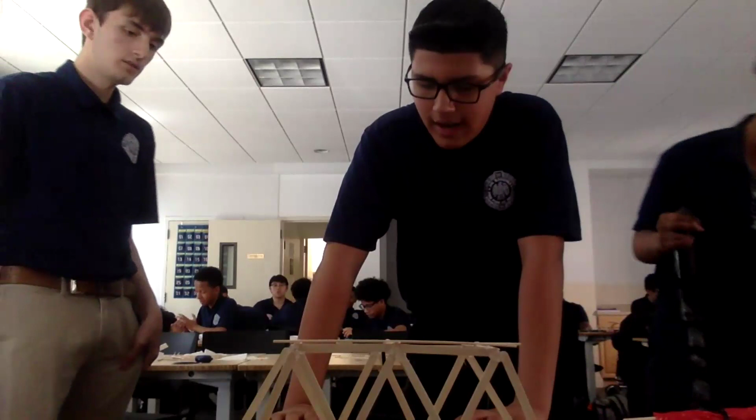So we took inspiration from actual bridges, so we put the trusses on, and we also double reinforced our actual walkway for the bridge, to make it as sturdy as we can. Yeah, basically, you can see their walkway there. Oh yeah, that's impressive, very sturdy.

Looks like it has a really solid base as well. That's always important. Oh, look at that, supporting some good weight. Yeah, that's a lot of weight.

How much weight is that? 15, 16 kilograms here too. Nice, wow, that's like 35 pounds. That's really nice, everyone's pretty consistent. Yeah, everyone's hitting that 15, 16 kilograms. It's really impressive, that's the most we have.

That's the biggest one so far, yeah.

I like that they took inspiration from a real bridge and used the truss design as well as reinforcing the bridge deck. That's what structural engineers do daily. Isn't that cool? I think some of the greatest innovation we can have is from nature. The body, the Earth, and the universe are some of the most outstanding systems that have ever been developed.

We have one more coming. Nice, okay, killing it, James. I see a lot of future civil or structural engineers in this Zoom call.

So we have no clue what we were doing at all, right? So we just went with whatever we thought was right. We added triangles to the bottom, and we added support to the top as well. And our first trial we got around 6,000 grams, 6 kilograms.

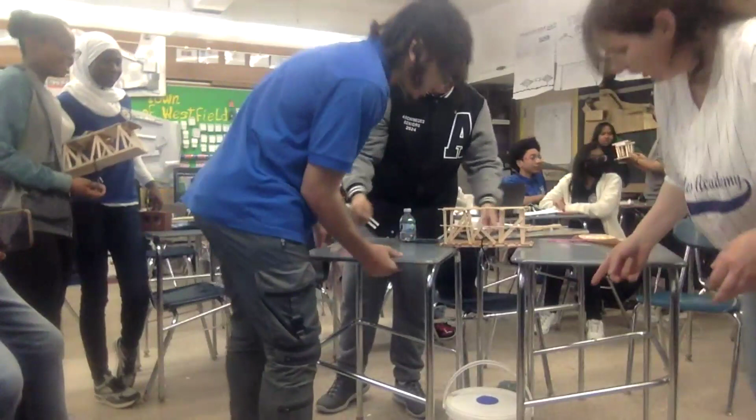This is a great view too, we can really see it all. Yeah, look at that huge bucket. Wow, that may be some serious weight.

Nice, all right, give me the brick. No, give me the brick. Archimedes, Bronx, New York.

Oh, he's adding a brick. Adding a brick. Oh man, the tension, no pun intended, see the tension. Look at how delicately that brick was placed, so gently, ever so gently.

Oh, man, don't worry, you got this bridge. Hey, you got this, you got this man, you got this. Brick number 2 is going down. You gotta have confidence in that beautiful lady, you got this.

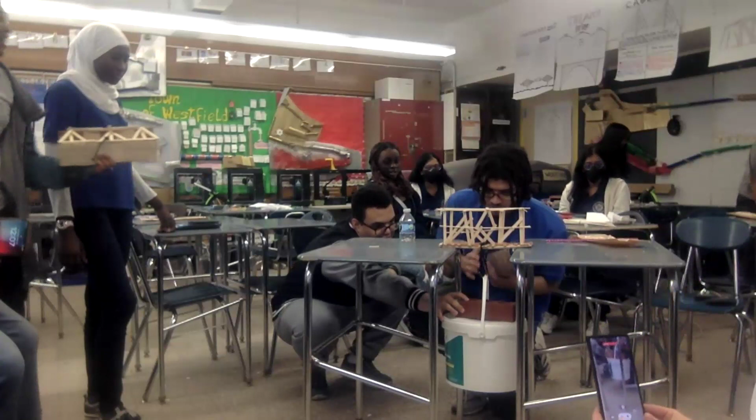That's the experience, yeah, put it on the side. Yeah, that's right, nice. If it breaks, just blame Jerry, he's there with you.

That's nice, look at that. Let's go. That's right, I love the excitement. That was 18 pounds, right? You all did a great job. Can we get the next one? Well-deserved celebration, yes.

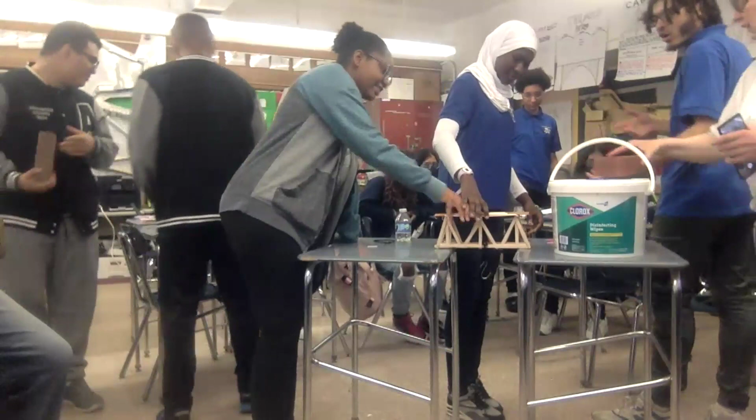So Archimedes is going to test one more bridge. All right. Check out the sturdy base design. There is no budge, wow, that's really sick, impressive.

I'm trying to figure out, Morgan, what's going on at the top of this design. All right, Archimedes would like to test one more. Okay, all right.

They have a great setup, Archimedes has a great setup. Hey, Monica, is this the last school? This is the last school. Okay, I don't have anybody else. So yeah, as Monica would say, you gotta bring it, you're the last one, you gotta bring it.

Another nice design, that's nice. Jerry, you're doing a great job out there, man. Great job by the students at Archimedes. Yeah, you're doing a great job as well. No, it's not, we'll see. All right, let's see, 18 pounds, 18 ounces.

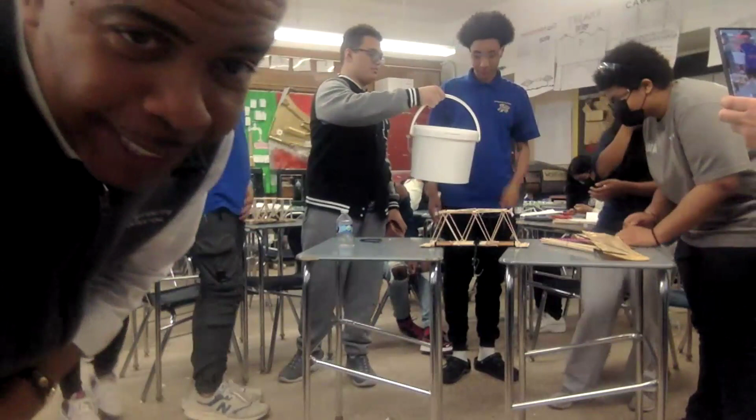So all right, here's the test, let's see it. What do we think, this bridge is going to take the bucket and both bricks? What are you thinking? I don't know if it can handle a brick. You don't know if it can handle a brick? Let's see with the bucket.

Oh, there we go, right, there we go, very solid. Sheesh, I was wrong, Monica. All right, here comes the first brick. It's holding, that is nice. It's holding, it is.

This class, they really should have a competition and get some more weight and see which one's the best, because they are killing it today. Yeah, everyone at Archimedes did an amazing job. Yes, they did, it was able to hold both those bricks. Great job, yeah, look at that, I love it. Oh man, I wish I had a strong bridge, future structural engineers. Yes, fantastic job, thank you so much Jerry and Archimedes.

All right, Milton, I think those are all the bridges we're going to see today. We're back to you and Lonnie and Morgan.

Excellent. Well, I want to give some parting kudos to you all here. I wanted to show off some of these awesome bridges before we transition to a very exciting speaker that we have here today, Nicola. Man, you all are going to be blown away. I read some of your background, very impressive, and you just have a great personality, very engaging.

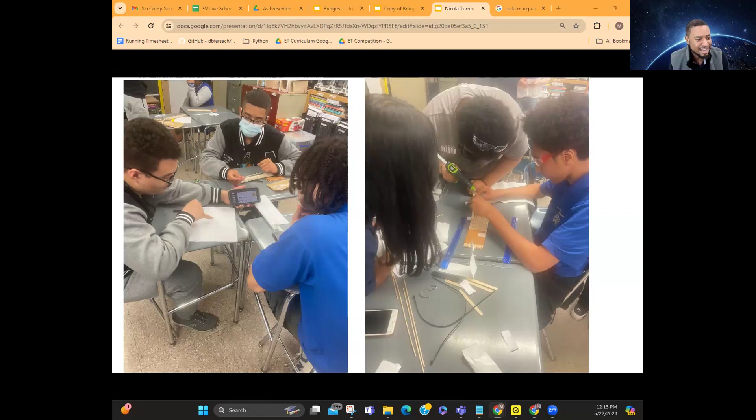So we are going to have a really nice guest speaker for our intro today. You're going to be very impressed, but we're also extremely impressed with your bridges today. Look at that, I want to highlight this is the paper design, this is the prototyping phase. Hey, I'm gonna play with the paper designs first, kind of figure it out.

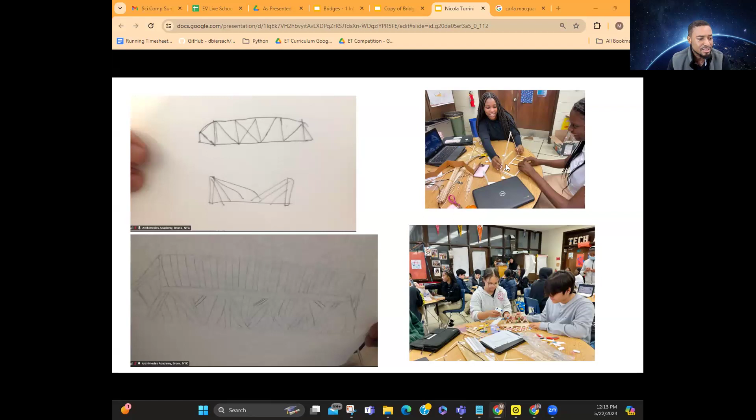That's great. Also, I love this, working on the sketch first. I mean, you can't beat that, right, Monica? If you have a good sketch, you got a good design, then your build is going to go so much better. I also love seeing the students who are just kind of working through the process, putting the parts together before they made their final bridges, right?

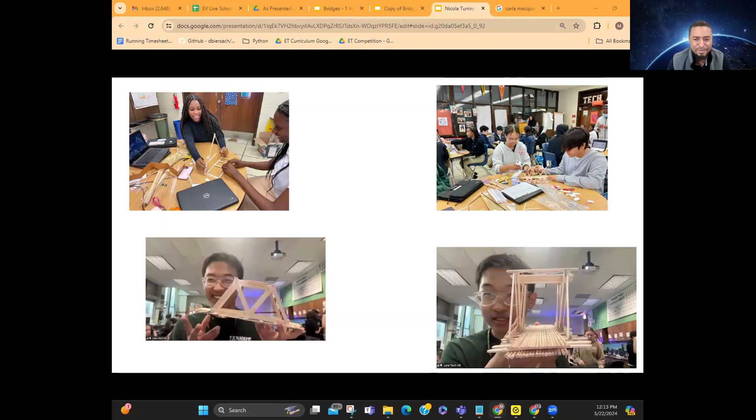And man, look at this, look at those trusses, look at this excellent base with those dowel pins, the teamwork, Monica making the dream work. You all were just killing it today. A little aesthetic appeal, you mixed in a little pink, a little blue. That's nice, extra tape there.

And then the testing, man oh man, the testing. This school, what's the name of the school again, Monica? This was Archimedes, Archimedes, this is where Jerry is. The testing, Jerry Dawes, you all absolutely wrapped up our day wonderfully. I mean, to have a whole, I don't know what this is, a quart bucket plus 2 bricks, that shows you all are engineers, engineering tomorrow, and maybe even the structural engineers of the future.

And speaking of a structural engineer of today, I want to highlight Nicola Turrini, I pray to God I pronounced that right. He's a structural engineer and a project senior manager, right? Also, he's a project management professional, that means he had to go through additional testing and certification in order to be a project manager. It's similar to being a professional engineer, that means he's certified as a project manager. He has his BS from the University of Modena, and also before coming to Bridges to Prosperity, he was a project engineer at Faycor. And now he is the senior manager at Bridges to Prosperity, which is a game changer.

We talked about this in our intro video. I mean, they are making it happen for countries and regions that just don't have the resources to have access to clean water and all that good jazz. I don't want to ruin it, I don't want to give too much away. So without further ado, can we give a big round of applause for Nicola? He's going to kill it, you're going to be so surprised.

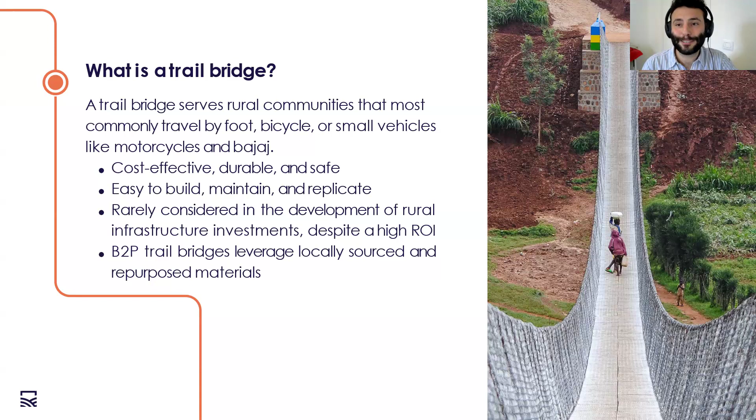But mostly, again, it's about the impact on the people. A study on the effects of our bridges found that communities served by our bridges experience an average 30% increase in overall household income compared to control communities not served by our bridges, a 60% increase in women entering the labor force, and when we talk about education, a 200% increase in attendance for girls, or 12% increase in student enrollment, just because there is a 365 days per year safe connection to the other side of the river where there could be a school.

When we focus on healthcare, we're talking about a 32% increase in facility visits, or a decrease in health center transport cost of 33%. This is just the tip of the iceberg, but it shows that a bridge is never just for itself, it's for the users, and the effects are incredible. There's a total change of mindset in the people living around the bridge when it's built. That makes me tick every time I wake up to do my work. Bridges like this can repay themselves in 2 years because of the increased economy of their communities. It's very mind-blowing to me.

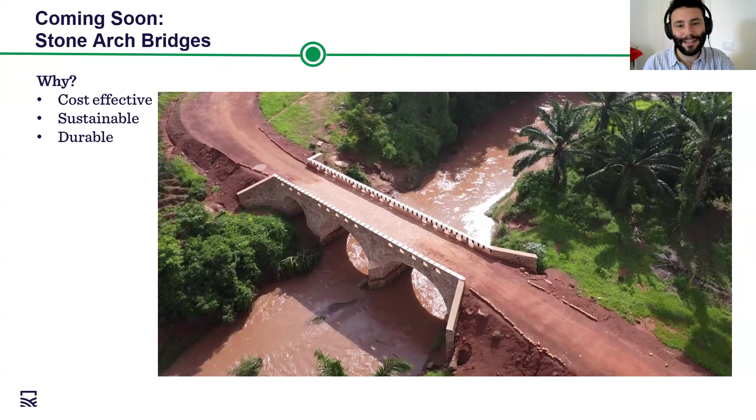So another exciting development. But let's go back to the trail bridges we're focusing on right now, which are wire rope cable bridges. Why did we choose that type? Because it's very light, and it permits you to make it longer, spanning the entire river without putting any pier in the middle. If you put piers or supports in the middle of a river, when it floods, like in the video I showed before, those piers can be damaged. So you want to stay away from that—that's why we went for cable bridges.

We have standard bridges that are very easily designed. It's about choosing the distance, the span of the bridge, and the difference in height between the two points. Knowing those factors, we know how big the abutments need to be, how big the towers need to be, and so on.

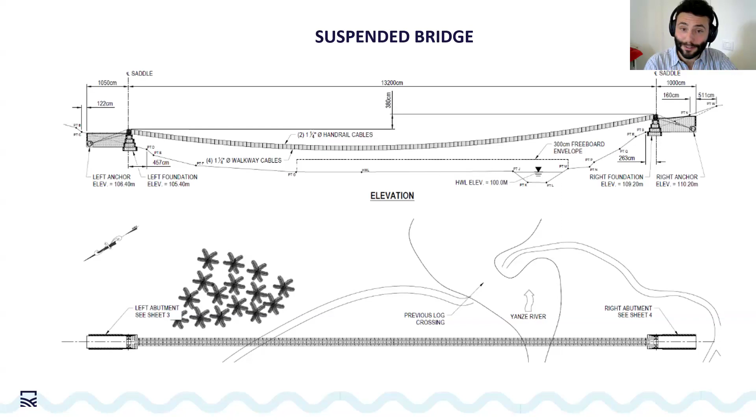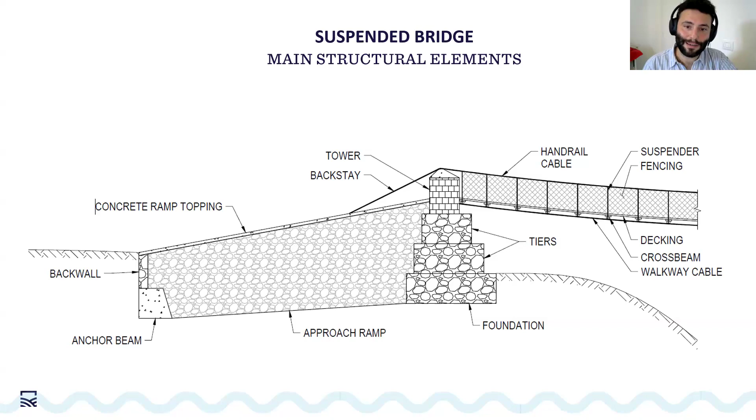In this case, it's a suspended cable bridge with 2 big abutments at the side. It works well when there's a kind of gorge or canyon where there's space for the walkway to hang from it. This is how it looks in the blueprint—this one is 132 meters long, very long. These are the main structural elements: you can see the foundations, the towers, the anchor in the back, and the walkway system in the front. And here are a couple of photos of suspended bridges.

Then we have suspension bridges. Think of the Golden Gate Bridge—this is a very iconic type of bridge. We use it when the valley profile is flatter, and when it's flatter, there's no space for the walkway to hang from it, so we need to raise it with the cables on top this time.

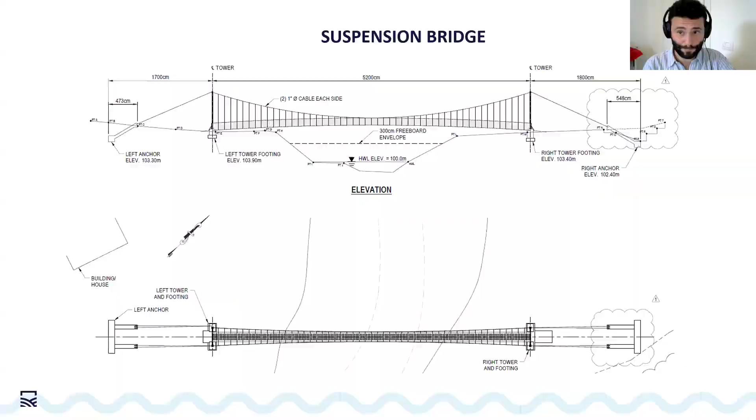The cables connect to an anchor in the back that is below ground. Here's the blueprint, and the interesting part is there's a footing and a pedestal made of concrete, a tower made of steel, and then in the back this anchor below ground, which is a concrete beam with two arms that stick out to get the cables. And this is how they look.

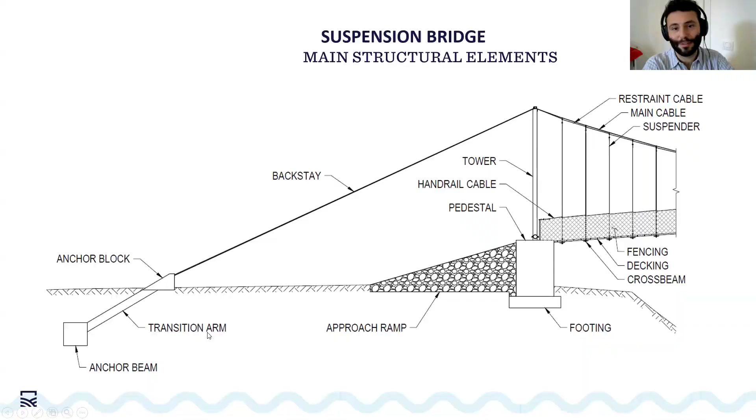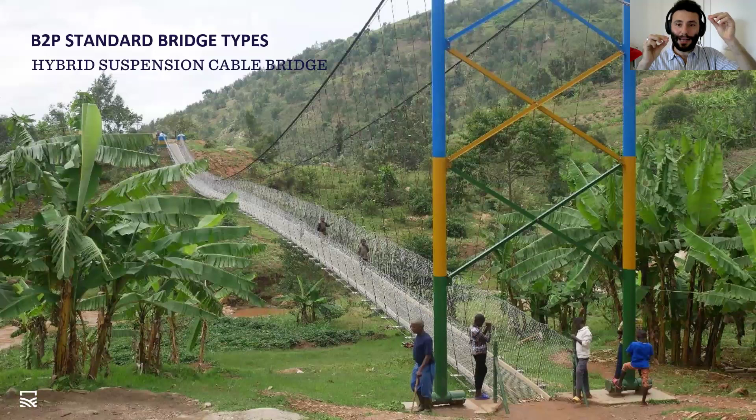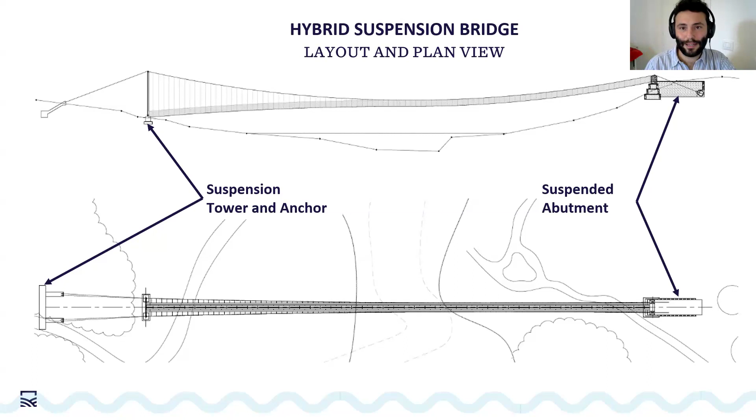It was very amazing to work on those projects. And finally, we also found the need of a hybrid between the two when the difference in height between the two sides is too high for the other standards. You can see here, we just put a suspended abutment on the high side and a suspension tower on the low side in order to cope with this, creating this almost S-shaped walkway that though looks weird, but really works as well as the others. So this is just to mention a little invention that we found along our way.

Milton, I'm gonna continue with the time that I presumed I had. Tell me when I need to rush and I will start rushing. Oh, you're doing a great job. I'm loving this presentation, just give it a couple minutes and I'll jump in and ask you some questions, man. This has been great. Okay, I'm gonna continue a bit, and then you tell me when I have like 2 minutes, and then I will push at the end.

I wanted to tell you what's behind building a bridge. It's never just building that bridge. It's about understanding the need before. So what we did in Rwanda was sending out assessors to more than 1,500 sites in order to understand where the bridges were needed by the communities, and some of them have been selected depending on the topography and the technicality to host our bridges. Once the needs assessment is done, then we have our engineering team going for a technical survey with topographic instruments.

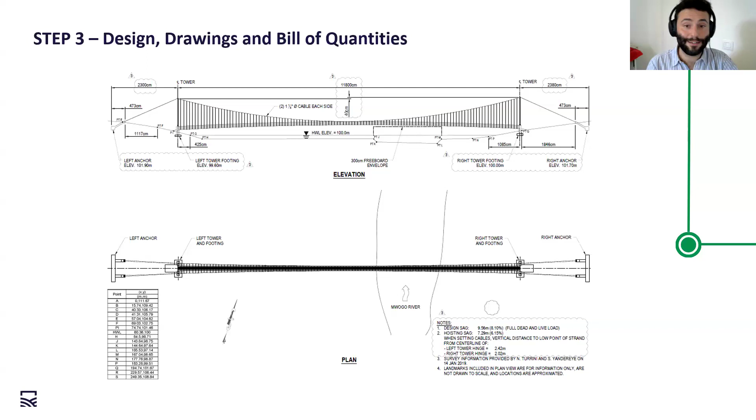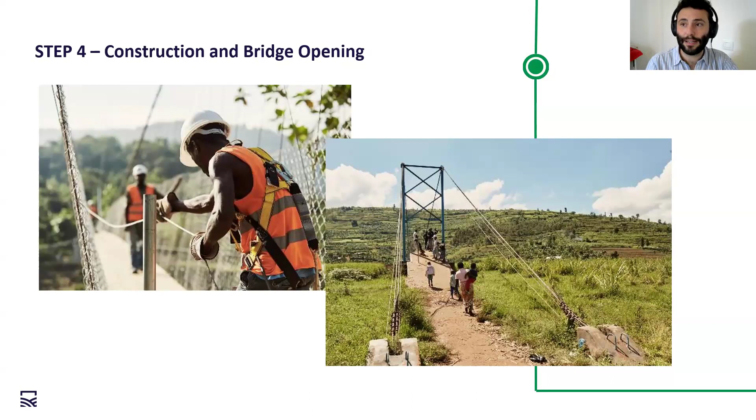Like auto levels or total stations. You can look at what they do, but basically they recreate the profile of the valley in order to then put it in a computer and start drawing on it and designing your bridge. With that, we create the blueprint and the standard designs with all of the standards that we have. And finally, we deploy our construction team that goes and builds the bridge together with the local labor that is hired throughout the construction of the bridge to build their own bridge and is trained into the inspection and maintenance in order to keep it alive throughout the years.

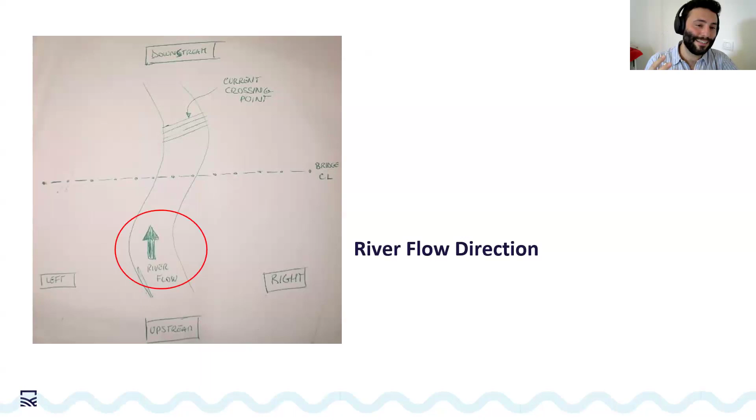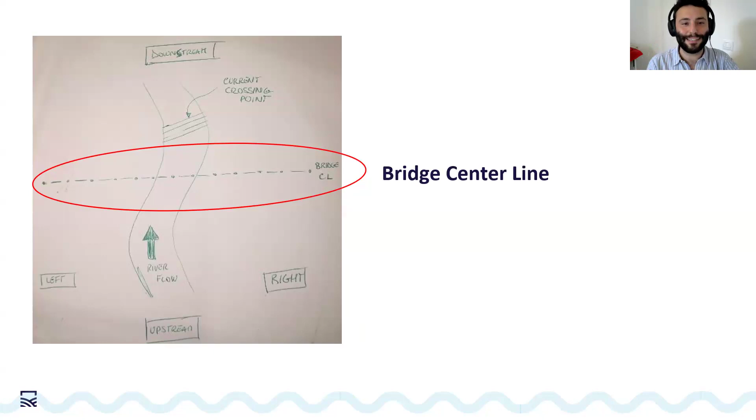I'm gonna run quickly through this. I wanted to give you some concepts of what some words mean. The river flow direction is the one that defines what is upstream, where the flow comes, the downstream, where the flow goes, the left and the right. And then there you are gonna put the bridge center line, which is basically just the center, a line that passes through the bridge.

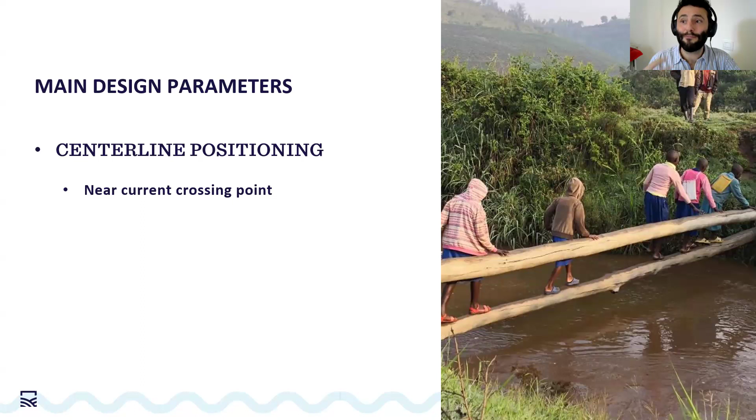We generally start with the positioning of the center line, which is where the people currently cross. You can't put a center line of a bridge where people don't cross, because they will keep crossing where they were crossing before. So it's important to see where they were currently crossing, either on a log, either swimming, either jumping on rocks. It really depends. When there is no bridge, people invent ways to cross.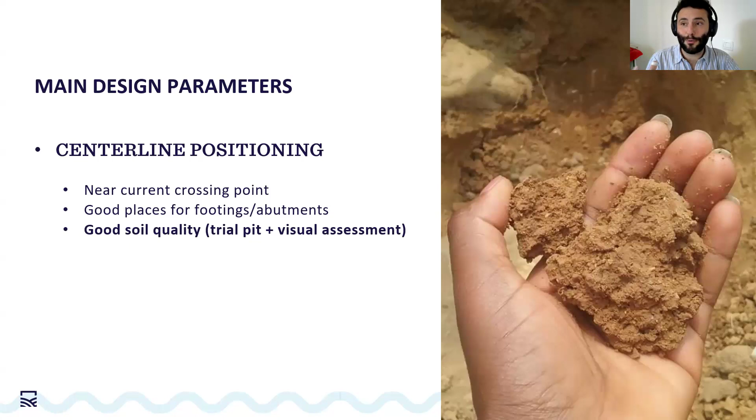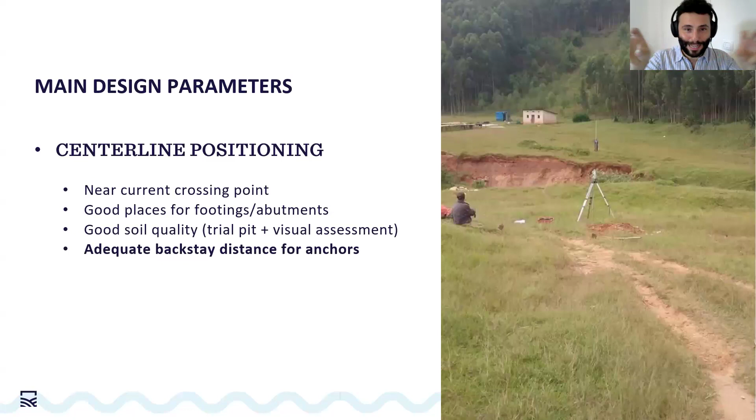Then you need to find good places for the footings and the abutments. You need to check the ground for geotech, to know that the ground is going to be strong enough. Then you need to give enough backstay for the designer in front of the computer to play around and decide the length of the bridge. And finally, check and keep the difference in height small, because the more difference in height, the more disequilibrium there will be between the loads at the side of the bridge.

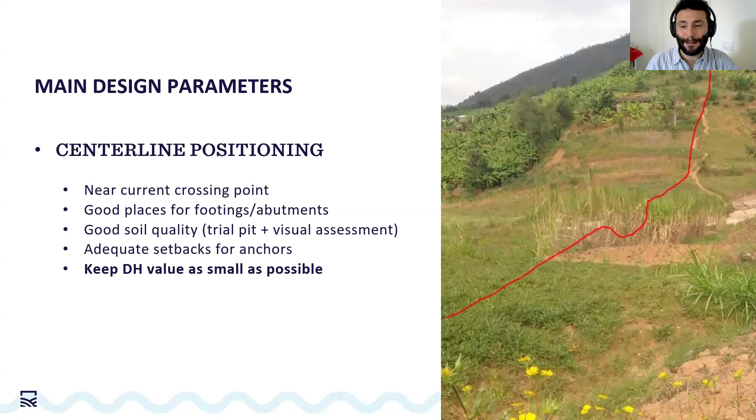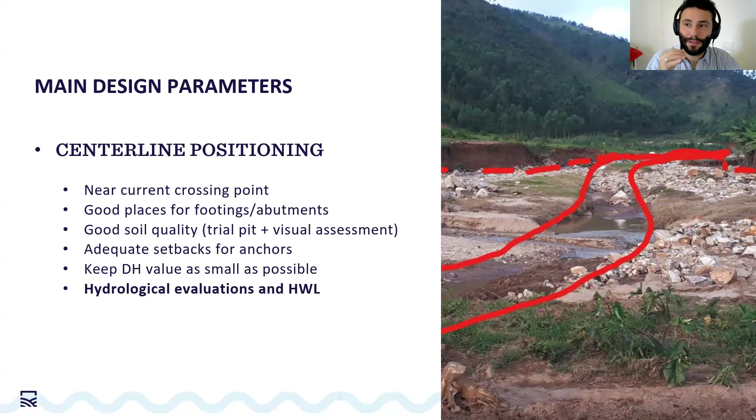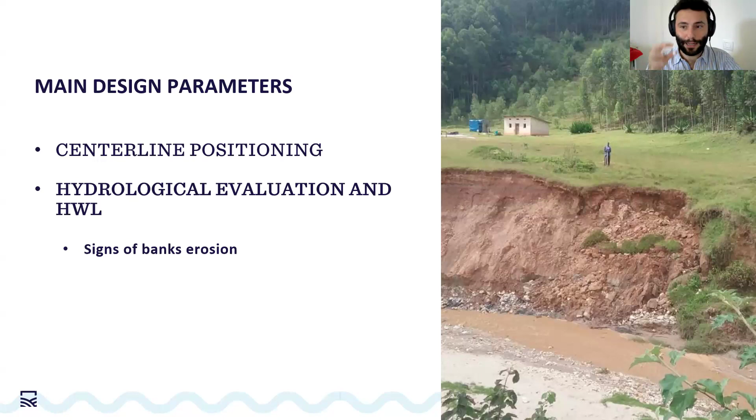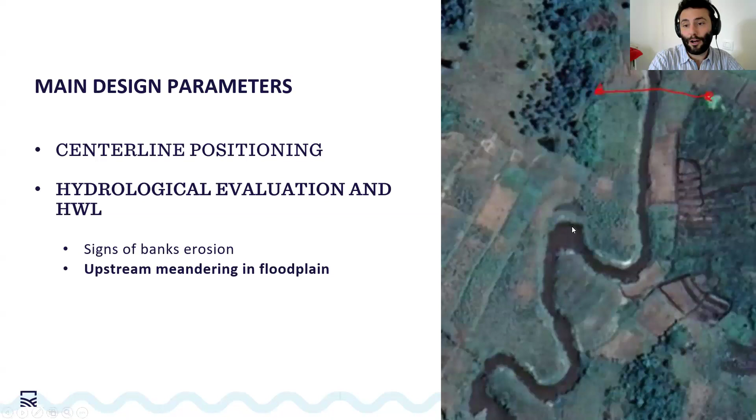I'm giving you a lot of information, but I hope that it's simple enough to be understood. The most important thing that you need for a bridge is to understand the past of the river. That's really the highest danger for a bridge, so we spend a lot of time checking signs of the erosion of the banks to understand what happened this year during the floods and how the erosion can go backward and eat ground in front of the bridge, which we check for meanders, which are the curves of the river. So you see an initial solution that could have been 50 meters, you can see that the curve upstream of the river can actually be eroding up to the center line.

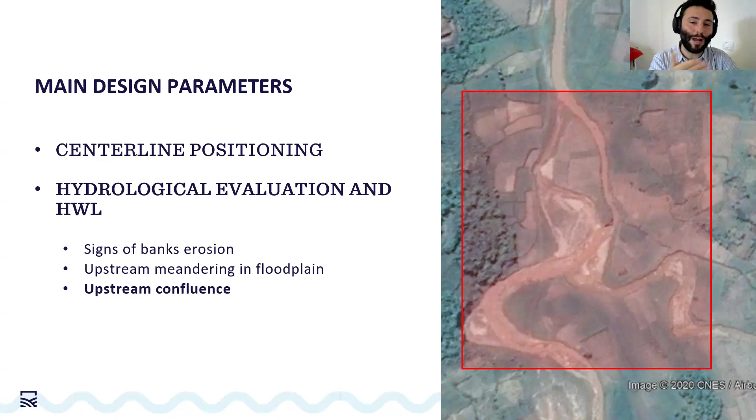And so we would need a longer bridge in order to make it with more longevity. Then we need to avoid upstream confluences because that's just messy—it's an area where there's a lot of energy and the rivers just go right and left all the time. And finally, the most important thing, we need to check the high water line, which is the highest level that the water has reached in the past. And that's normally, we ask old people to tell us, because we don't have data there.

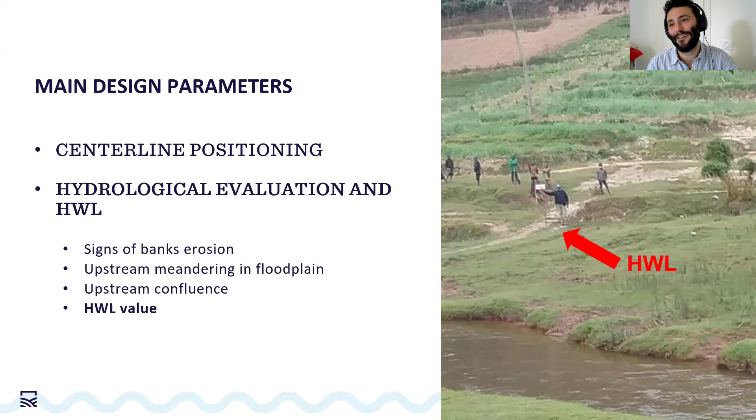Tell me, Milton. No, this is so rich. I mean, I hope you all are enjoying this. I mean, it's not just bridges, it's loaded with life lessons, man. It's just really good.

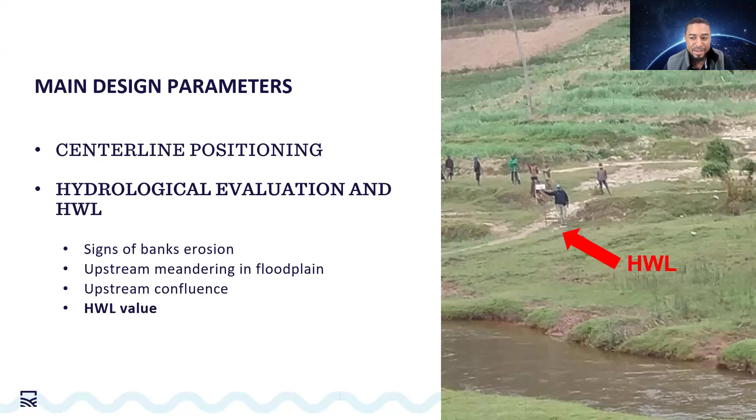So can I jump in and ask you some questions? Is that cool? Yes, please. Okay, I'm going to start with questions students provided because they're the most important, right? I'm not as important as them. If you stop sharing your screen, people can kind of see you a little better as well.

You said something that was so profound. You said, imagine if you had to risk your life to go to school. I mean, I hope you all are thinking about this. Imagine if you had to risk your life to go to school, to go to a hospital, to go to the grocery store, to even just have access to things we're addicted to, like the internet, right, Nicola? I mean, these bridges are really game changers in people's lives.

So I got a question for you. How do these local communities respond when Bridges to Prosperity arrives to partner with them? How do they respond? Yeah, that's a good question, and it's at the base of the sustainability in the way that we work.

We firstly always come together with the government. We always partner with the local government. We never come alone and say, you need a bridge. We come with a local government where the community already asked for a bridge, so they already know their need, and that's very important. You can't go to someone and tell them what they need—there needs to be much more behind it. So that's the first point that makes it easier to tackle.